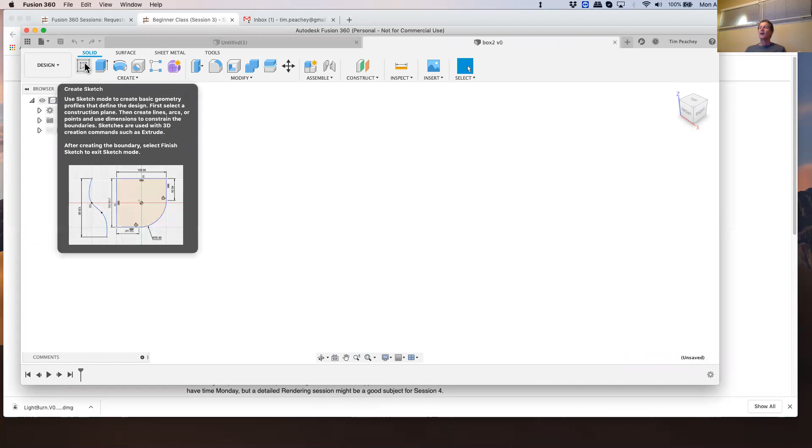And I'm going to create a sketch. Sorry, before I create the sketch, I'm going to do the parameters. So we want to do our top-down design approach and create our key parameters for the design.

Now, there was a question last week about favorites, so I examined what favorites was. Basically, if you have a complicated design with a ton of parameters but a few you want to find at the top of the page, you star them and they become favorites at the top. They are still only local, they are not global.

And there was also a question last week about exporting the parameter table and importing it into a different design. What I found was there's an extension out there - not one of the pay extensions, but one you can find by Googling it and install to export the parameter table as a CSV file and also import CSV files into your parameter table. So there is some sense of being able to do family design and a top-down hierarchical parametric approach to a family of parts or products.

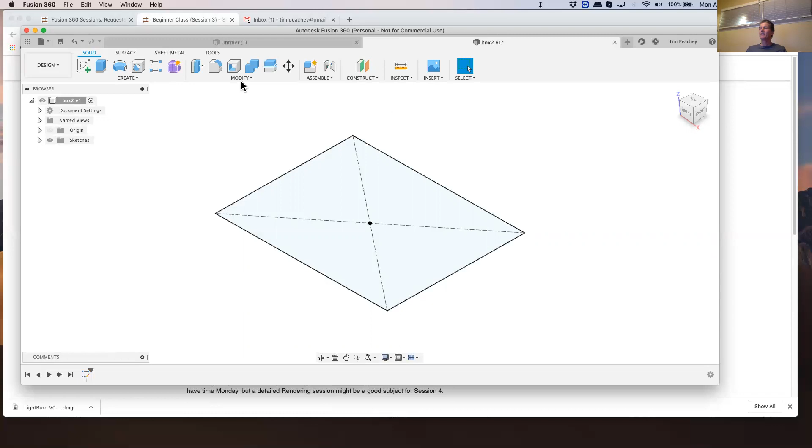Basically, if you go to parameters, when you create a new parameter there's a unit pull-down. So you have no units for fractions and counts, but then millimeters, centimeters, meters, microns, feet, yards, miles, nautical miles, mils, different approaches to angles, and a whole bunch of other kinds of parameters that might get used in analyses, management of materials, and things like that.

But you could mix units—like for width, you could have put that in inches. Absolutely, in addition to having the others in millimeters. So for example, I could come in here—let's change this one. Oh, we can't change it after the fact.

That's interesting—we can change the value but not the units, it appears. We can change the name but not the units. But we could create one here, and let's say we just call it 'lip' for the sake of argument, and make it in inches, say it's 3/4 of an inch. That's totally valid. Okay, thank you.

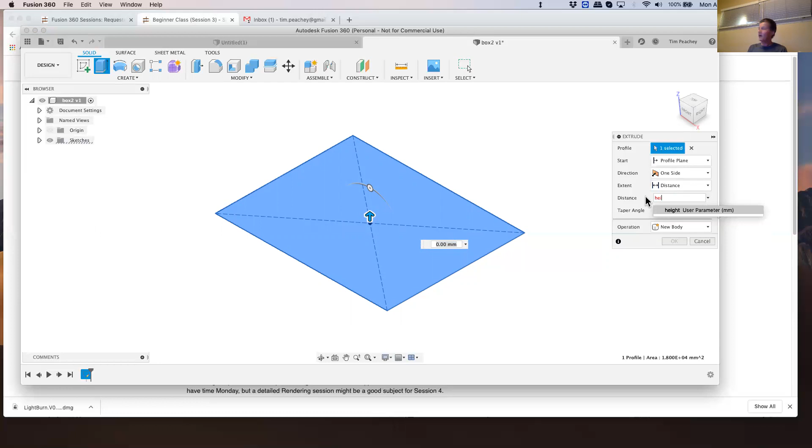So now I'm going to create an extrusion for my box, for the bottom of the box. I'm going to extrude this—it was already selected. The distance is going to be height times, now what did I call it—lid ratio, bottom fraction.

But there's something I forgot to do here, which I've tried to always remember and told everybody to do, and that is always create a component first. So I'm going to create this new component, called the base, and the parent is selected—say okay. Now I'm going to drag this sketch in here, and now my sketch and body and everything are in here. I pulled the sketch in, and since the body was a child to this sketch, it brought the body along into this part with it.

Now you'll see that I'm activated on the base, and my timeline has the sketch and the extrude. So even if we forget a few things, there's lots of opportunity to come back and repair what we've done wrong.

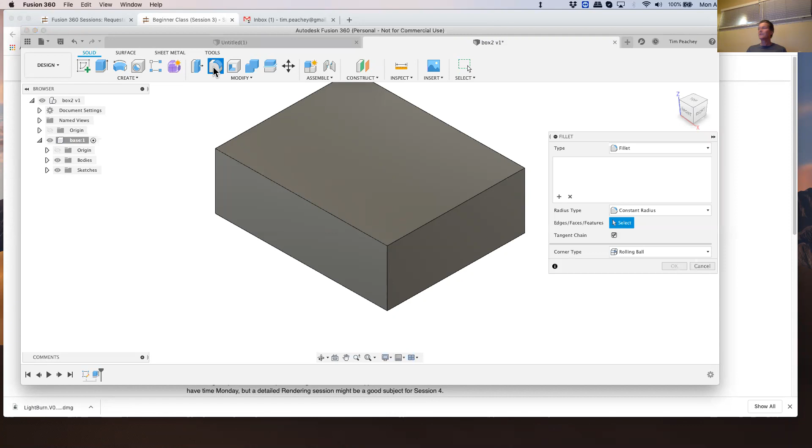Now I'm going to do my little trick of adding a solid fillet. I'll just grab these—whoops, not that—this edge, this edge, this edge, and we're going to say that could be, I don't know, 10 millimeters.

And I'm going to say okay. Now, we didn't control the outside radius of that fillet with a parameter—we did that on the fly. If we go back to the change parameter dialog box, we see now under model parameters it says 'base' because we have a base part that has some parameters. We can see the sketch—it has linear dimensions, which it arbitrarily assigns the values D5 and D6, but they're controlled by the expressions width and depth.

The extrude is controlled by the expression we put in for height and the default taper angle of 0. The fillet here is D10, and it's 10 millimeters.

Now this is perfectly fine if we figure that we never really need to modify this fillet. We don't need to fully parameterize, if that's a term, the full design. We can leave it like that.

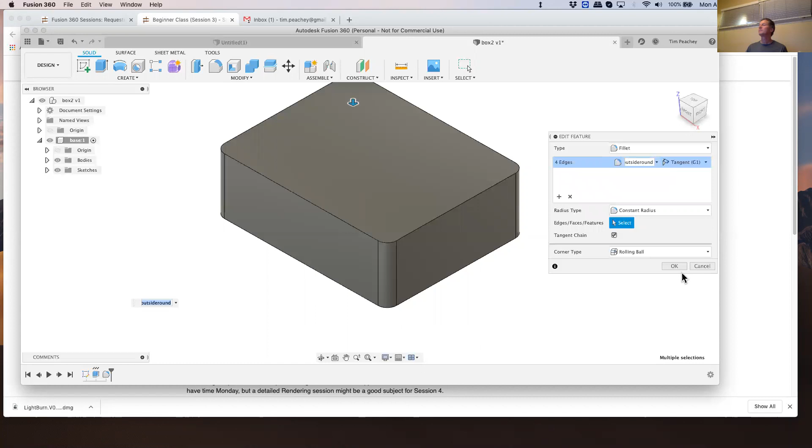Now when we go back here, this round, if we were going to edit it, we see that the value is outside round. So we can make the parametric relationships later.

Next thing I'm going to do is create the top. Think about this: do I want to create the top or do I want to finish the base? Maybe I'll finish the base. Remember from last week, I like using shell. So I grab shell, I grab this top surface, which means it's going to be removed.

And I didn't define the thickness, did I? I don't think I did. So if I go for thickness, there's nothing there. So I'm just going to say 2 millimeters for now.

But again, I'm going to say, you know what, I want that to be managed in the parameter table. So I'm going to come in here and add something called thickness, and then I'm going to come down to this shell and change this value to thickness.

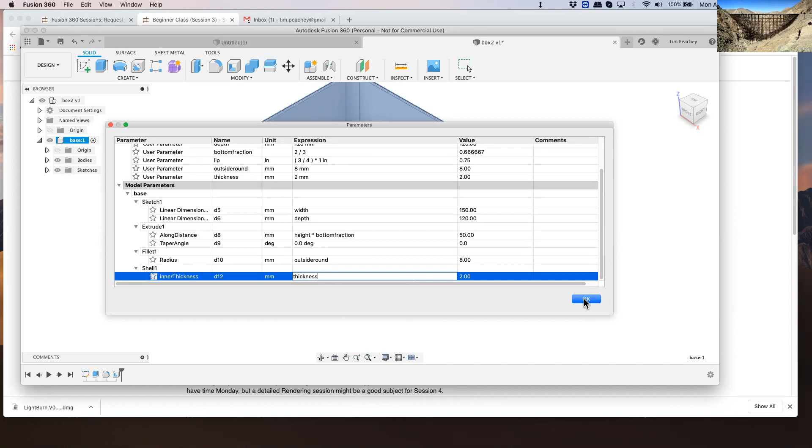Tim, can you confirm that the shell created a thickness of 2 millimeters on all 4 walls and the base? That's correct. So let's look at that with a measure. If we measure from this surface, using the shift roll key to go to here and grab this surface, you'll see it measures 2 millimeters. Great, thank you.

Okay, so there's my rudimentary box. I want a lip along there, and actually it's kind of narrow. It's kind of a thin wall for this size of box. So let's double the wall thickness.

So I'm just going to come in here to thickness, change this to 4. I'm going to try to change it to 4, but I'm going to do it in the correct field this time. And now I have a 4 millimeter wall.

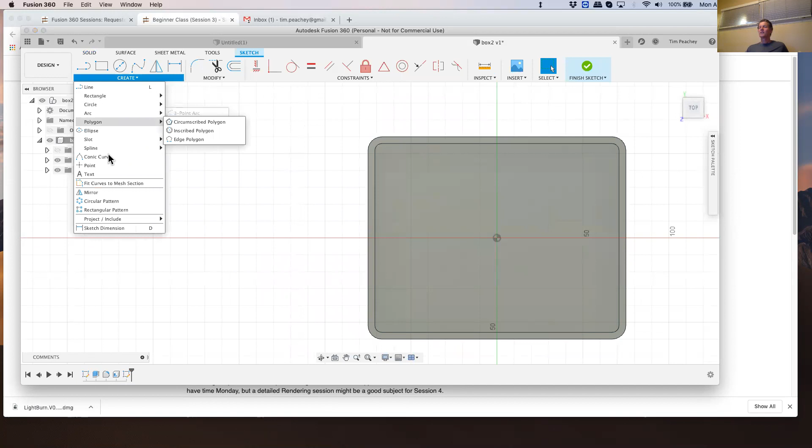So I'm just going to say the lip should be half the wall thickness. Let's create a sketch right on this top surface, and let's project this outer edge, and then let's do an offset.

And we'll do that from this outer edge, but we'll do a chain selection so that we get the whole outside edge. We'll bring it in here, and you notice it's negative.

And in the video, he was having trouble using the parameter, and I think it was because the value is negative to begin with, so it kind of does something weird here. So what we're going to do is we're going to go with that.

We're going to say -2 first, but then I'm going to come back and edit this dimension. Oh, it still says -2. So I'm going to say minus thick.

Why is it not working? Because I'm not spelling thickness correctly. Minus thickness divided by 2. And now we see the fx that tells us this dimension is controlled by a function.

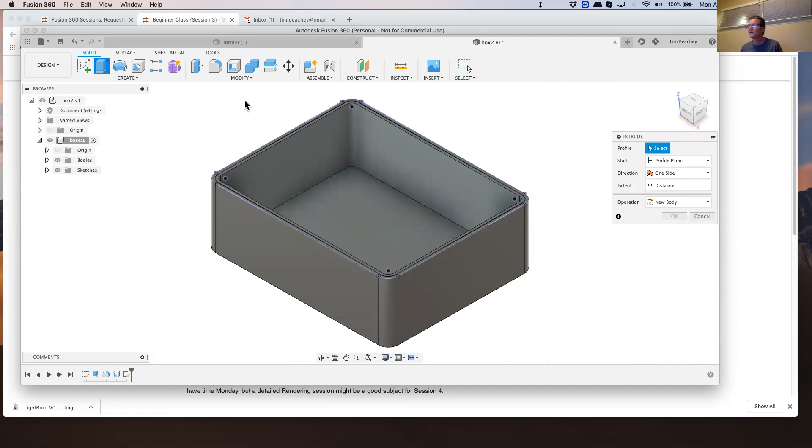And we'll finish the sketch, and we'll extrude this. Zoom in, make sure we get the right profile. And we'll take this down.

And again, I don't think that we had a parameter for that. So it's like, yeah, that's when we want a parameter because we're going to use it on both sides. So I'm going to go back to the parameter table, and maybe, actually, we didn't end up using this one. That was just for demonstrating something.

So let's add a parameter that says lip. I want it to be millimeters, so I had to delete it. And let's go with 5. It doesn't need a huge overlap.

And we'll come down again. We can either come down here and edit that in our extrude here. Minus lip.

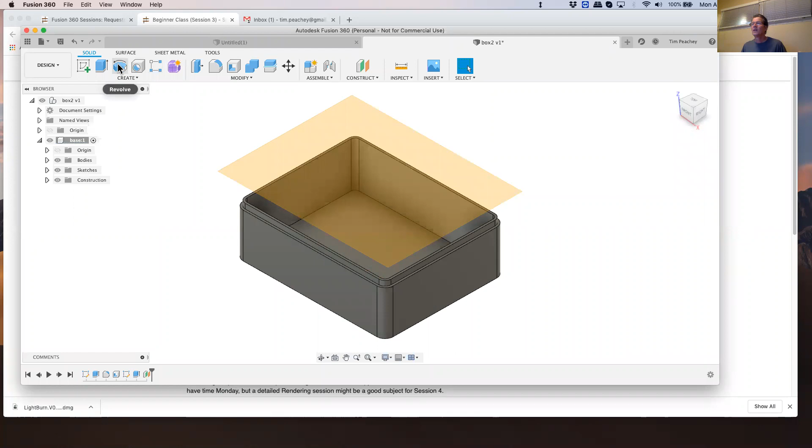So if I look at the front view, you'll see that plane is there. Okay, so I create that plane there, and now I go to create a sketch using this plane. I can project geometry onto this plane from any existing geometry down below or above for that matter. But it will put that geometry into the sketch on the plane that I selected as the sketching plane.

So if I go for my project and I pick, in this case, let's say I want to pick... let me find another edge here. What's it picking? Specified entity here.

Now I selected just that one entity by doing specified entity. If I look at part of the body, let me grab this. And that's my projected geometry. But what did you grab just then? I grabbed the outside edge of the box. And you see it's created this projection on the elevated plane.

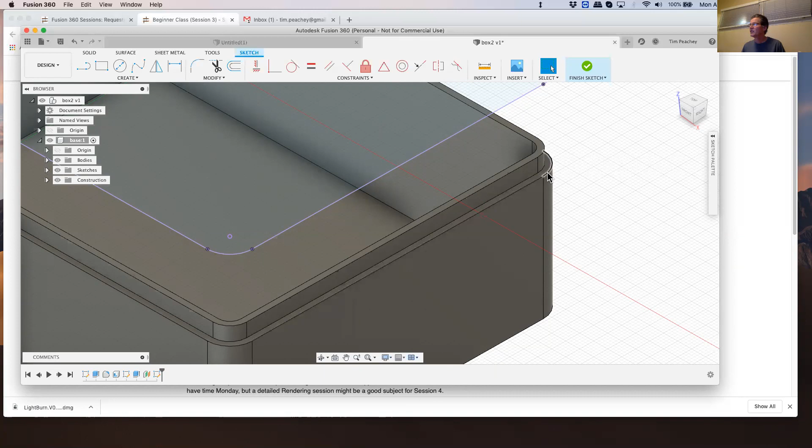So it's projected, basically it's projected the chain of edges that are consistent with this edge. So all the tangent chained edges there. Maybe not even necessarily tangent in this case, it's just the chain. And giving me that closed sketch on the plane up above.

So those two planes, one your chosen plane that you want to project, and the projected plane, they are always parallel and only parallel. I don't believe so. Let's try. You should be able to project geometry onto the, it'll be in the perpendicular direction.

So for example, if you have geometry on an inclined plane, yes, you'll get it projected as it would be viewed perpendicular to your sketch plane. Okay.

So for example, if it were a rectangle, the rectangle on the inclined plane would be larger than the projected rectangle on the sketch plane. Is that, or projected rectangle on sketch plane, you understand what I mean? Yeah, I'm with you. Okay, thank you. Yep, no, good question.

So when you did the projection originally, what were you projecting on? I wasn't really following that, I guess. Yeah, it wasn't as clear because what happened was I was projecting on the same plane.

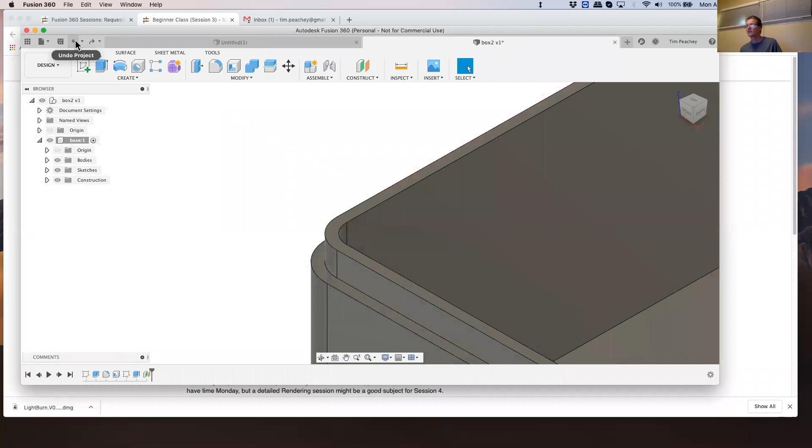Okay, so actually let me do that a little bit differently to make it more obvious. Let's just back up to beyond this sketch. We'll skip that plane and we'll start right here. So in this case, I'm going to create a sketch, and I'm going to start on this plane here.

Okay, and I'm going to project the geometry from the outer edge. Okay, so now when I look, you see the geometry is projected from here, but onto the plane defined by this surface.

So in this case, there's 101 ways to model things like this, but this kind of follows the way my logic works in terms of defining the model, the part. So I'm now going to finish the sketch and extrude this profile.

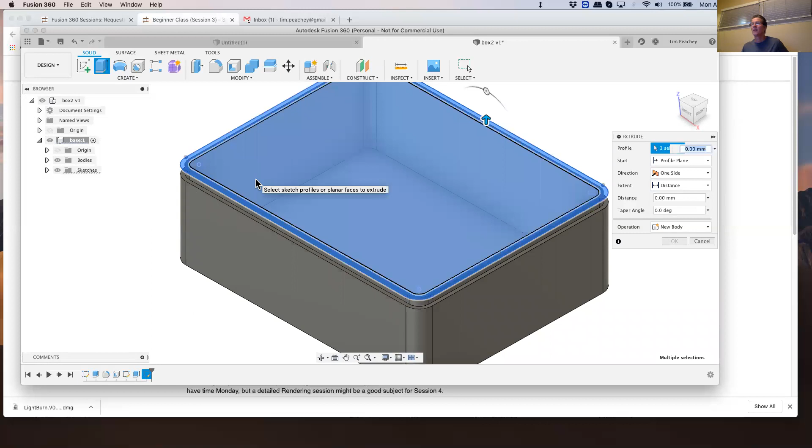Now Fusion does this interesting thing where, even though we've got a single sketch, it doesn't take the whole sketch when it sees other things in plane like that. So we have to sometimes select all of them. Now, we wouldn't have to select all of them. We could just select the wall portion, extend the wall up, and then do a base on it. In fact, maybe I'll do that.

But when you were selecting, you were doing just simply the click with the shift key down and accumulating the bodies? Don't even need the shift key. Don't need the shift key with Fusion. Fusion 360 likes to do single key selection.

Okay, now the height of this extrusion, this is the top, is going to be height times, height times bracket 1 minus bottom fraction, right?

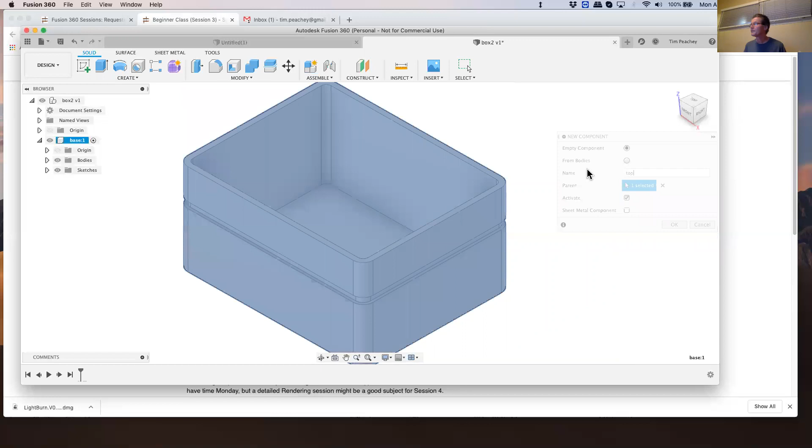So now, what did I do wrong? This is in the wrong part, right? Remember, I needed to create a new component. That component should be the top. And it's now active. Now I'm going to come over here and see if it's going to let me move that sketch into there. It did. And it moved the body along with it.

So now top has what we just sketched, because otherwise it was just an unseparated extension of the first. Correct, it was just another body inside the same component. Got it, but now it's a component inside of a component. Yeah, now it's a body inside a separate component. Oh, you're right, this component is inside this component. Good catch. So what that tells us is it's treating this as a subassembly of base, and that's not really what we wanted.

So let's drag this into the top assembly. Now it's a peer to the base. So these are the kinds of hierarchical and parent-child relationships we need to be careful of, and one of the things Fusion 360 is actually easier than some other packages at fixing. So it's easy to do this sort of drag and drop reordering.

It works well. Now, you do need to be careful about the time order in which you do things when you are using geometry from another part, because we're not finished designing the base and we're already using its geometry for the top. If we add features to the base, those features won't impact what was done to the top already because they're at a later point in the timeline. Now, if we go back and change the earlier features or the early parameters, then it will affect it. And it's sometimes a little tricky keeping that all straight.

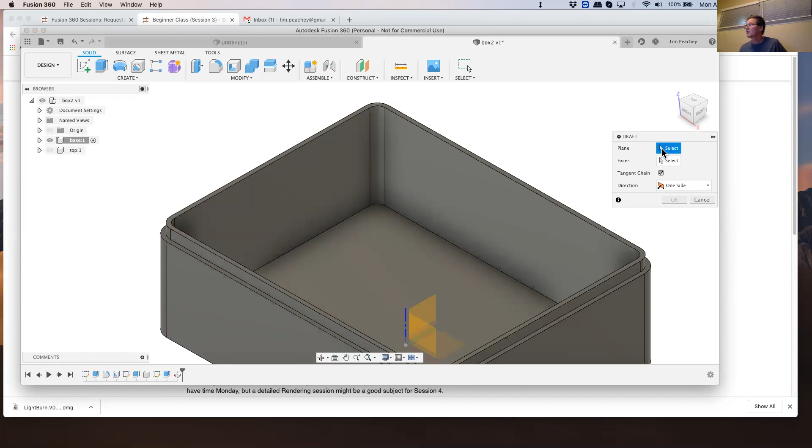So that's something called a draft angle. And so we're going to pick a plane. This is a base plane or a ground plane from which the angle is measured, a parting plane. The term parting comes from molding, because this is something you would typically do in molding or casting. Now for the faces, again, I've got tangent chain selected. Now I'm going to pick this face. And because the fillets make all these other faces tangent, I've collected the whole ring. Let me just spin that around, show you what I mean. So the whole edge around there is selected.

And now, let me go back to my home position. I can give that an angle. I don't want it to be a real crazy angle, or I'm going to have a knife edge at the top, but 5 degrees sounds reasonable. Now what happens is, as my top is moving through a bit of an arc because of the hinge, when it closes, it's going to have a little bit of give right until it gets there.

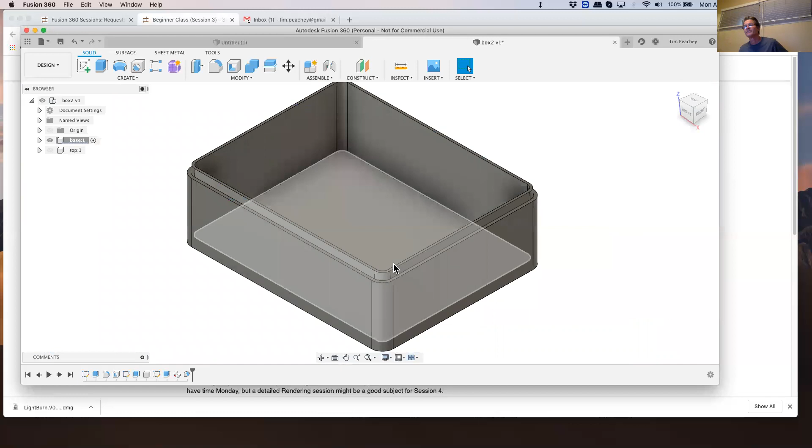So that worked well. I'm going to turn off the base and turn on the top and activate the top. A couple of things that are missing, the actual top of the top. So let's try something here. Sometimes we can infer, if we're drawing something, we can infer profiles from the plane that would be the sketch plane. So let's see if we can't select this profile.

Hey Tim, just a quick question about the way the logic of the application works. You didn't choose this component and start working on it, you turned off the visibility of the other component. Does it then fall to this one? No, I had to discreetly do that. I can have the active component be hidden. Right now, the active component is hidden. Now it ghosts it to me to let me know that that's actually the active component. Okay, so you actually selected it and I simply didn't notice. Correct, yeah. If I select up top, the top assembly, it's going to ghost the whole thing.

But if I come down here and the base is off, then I'm just going to see this. Got it, thanks. Yeah, no problem.

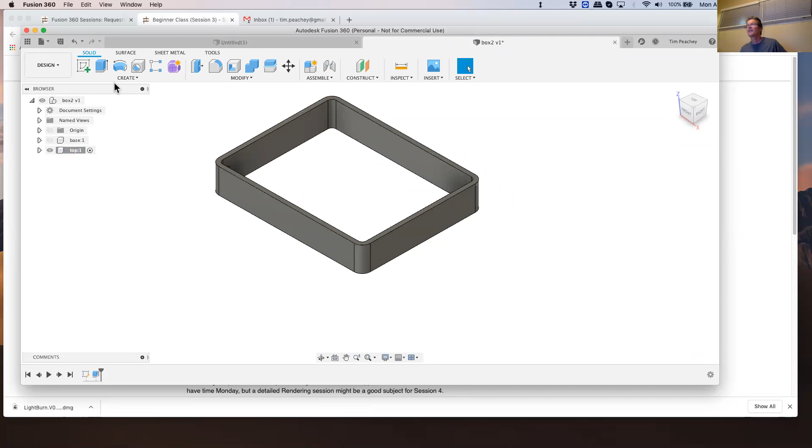So now let me think about this. If I were going to use a surface here and extend it, Fusion 360 is actually smart enough that I can just grab it. But in this case, I want to do the whole top surface, which includes the hole in the middle here, so I'm actually going to have to create a sketch.

I'll create a sketch and use this surface here, and again I'm going to use project. There are shortcut keys, I could use P, but I don't like to do that when teaching because it's less easy to see. So I'm going to select this geometry, and it's going to give me both circles, but that's okay. I could delete it, but it's going to do this weird thing selecting it anyway, so I'm just going to say finish sketch. Now I'm going to create an extrusion.

I'm going to grab this and this, and extrude down. Now here's the interesting thing: I'm trying to add thickness, but because I'm going negative into the part, Fusion 360 jumped to the conclusion that I'm trying to do a cut. I'm not actually, I want it to join. And the distance is going to be minus thickness.

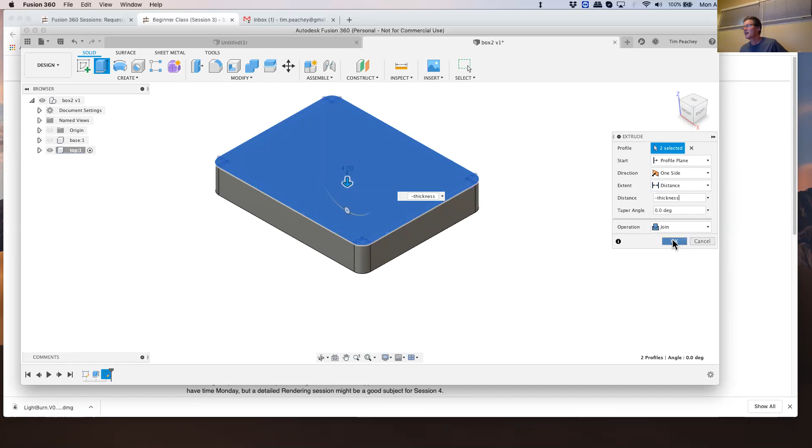So your top surface actually was from the plane you were working on into the model, as opposed to adding it on top, which intuitively would have been what I thought you'd do. You would think so, but the reason I did this is because I used the height parameter to drive the height of that first feature, and so now my overall height is going to be height plus thickness. Oh, right, got it, I've done it that way. So this is my design intent to preserve the integrity of my parameter.

Now if I activate the base, in this case, I have this gap here, which is the other part of the lip. So what I'm going to do is hide the base again, turn this guy over, and create a sketch on this plane. I'm going to project from the outside, and offset from the outside in, and that's going to be minus thickness, or sorry, minus lip. Minus lip.

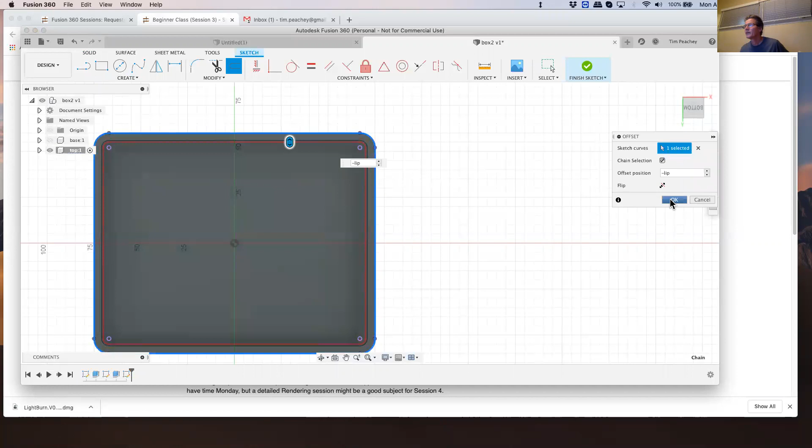That's not right, that looks too big. No, that's the wrong formula. Lip is the vertical lip, so this is going to be minus thickness divided by 2. We decided, right?

Okay, and we'll finish the sketch. Let me just orbit this a little bit so we can see it. Now we're going to finish the sketch, create an extrusion, and this is going to be this outside surface, and we're going to go up, or in this direction, by the amount lip. And it's a join.

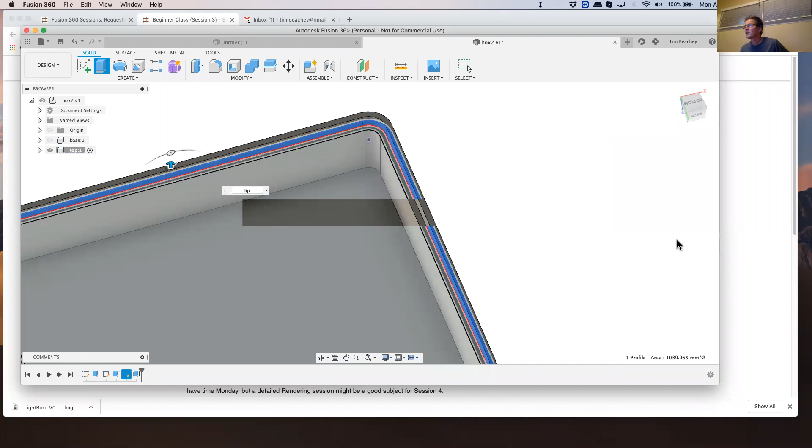And there we go. So now if we go back to our default and turn on the base, now we have the boxes closed.

Tim, were you going to do a taper on the upper lip as well, or did you just find that the bottom one was good enough? No, I like putting one on the upper one as well.

What I wanted to do is, let's go back to our fun little section tool. Grab this face, go in and have a look. Now, when we look from the right, we look in there, we see this gap. That's awesome, right? So now what we want to do is, our top is activated, yep. So I'm just going to say okay and save that analysis for later.

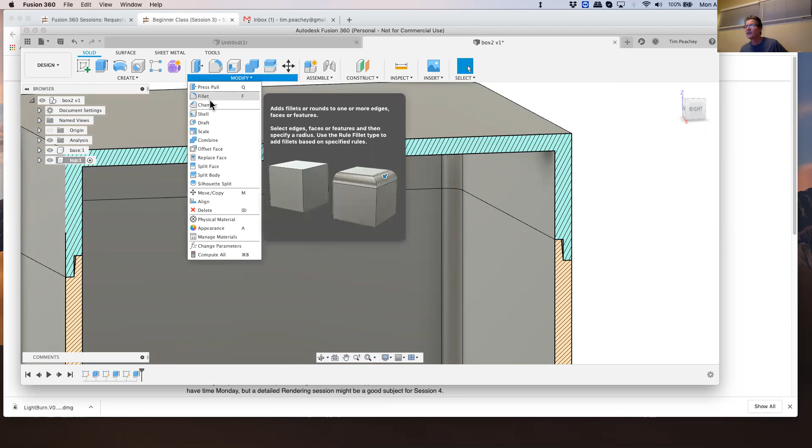And I'm going to modify this part with a draft. For the plane, I don't want to select this plane because I don't want a sloppy gap, so I can select this plane here instead. Then when I select the faces to draft, I'm going to come in and grab this one right here—again it took the chain around there. My angle, I'm going to take 5 degrees. Or you know what, maybe I'll make it 4 this time.

Now when I look in there, yeah, I actually do have a little bit of an extra gap there. And it's good to put in little clearance gaps and tolerance gaps, since our 3D printers aren't that accurate. That takes a little time, but I think most of us understand.

Paul Porter in the demo did some of that, so I'll leave that for you to learn from him, and the same thing with the hinge—I'll let you look at how he did the hinge, because I'd like to finish this one and move on to the next one before it's too terribly late. But this is a bit of a different approach. I like the shell; I like to build things all in one place.

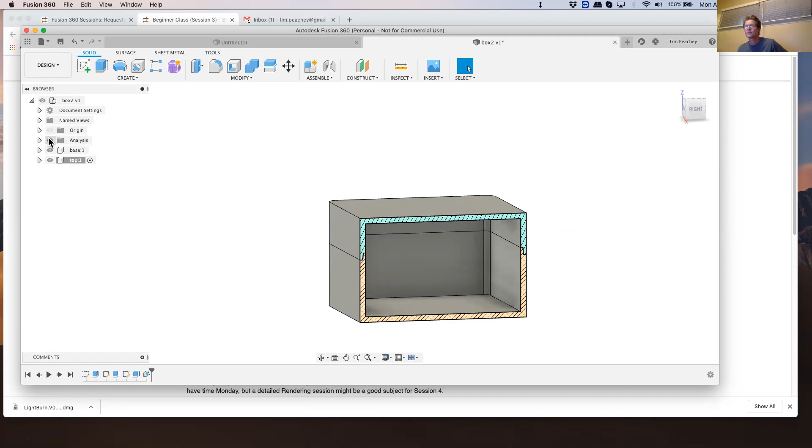And then later we can come to the base and export it as an STL if we want for 3D printing, rather than building them side by side and then exporting them to the printer. I didn't quite get the logic in building them side by side, unless it was because he's thinking about dropping them on the platen of the 3D printer.

So Hey Tim, a question. If at this point you wanted to make this, say, half again as big, do you have to change both the top and the bottom, or how does that work? So let's say if I've done the parameters correctly - it's a really good question. One of the things we should always do is basically flex the design. So let's see what happens if I make the height 150.

Okay, very cool, it went up. Let's make sure that we don't have an interference there. So we can do an interference check between this part and this part. Compute - no interference is detected. We can also turn on our analysis, come in here and look. Yep, it's still the way it's supposed to be.

Tim, could you define interference again? Interference, good question. Interference is a technical term for when two parts are trying to occupy the same location in space at the same time. Got it. And so the problem with 3D modeling is we can create interferences that can't really happen in real life, and then our part won't assemble.

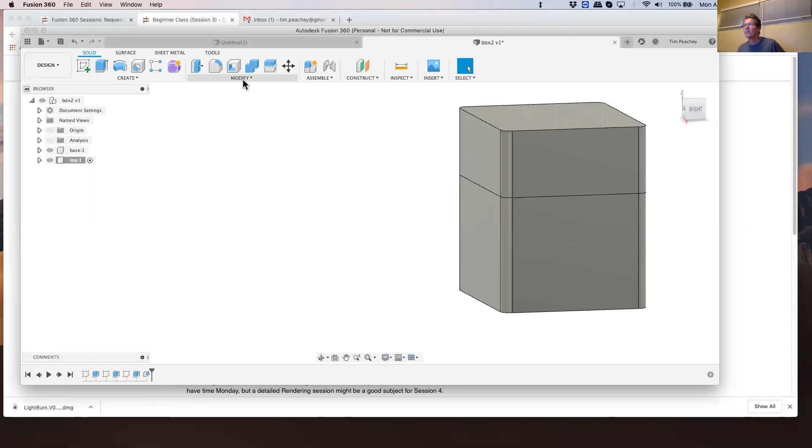So if we want a simple example, let me turn on the analysis, and then I'm going to come in here to parameters, and I'm going to come down to where we had - in the - looking for where I had thickness divided by 2. Let's look inside here. Let's say we did thickness times 5 divided by 6.

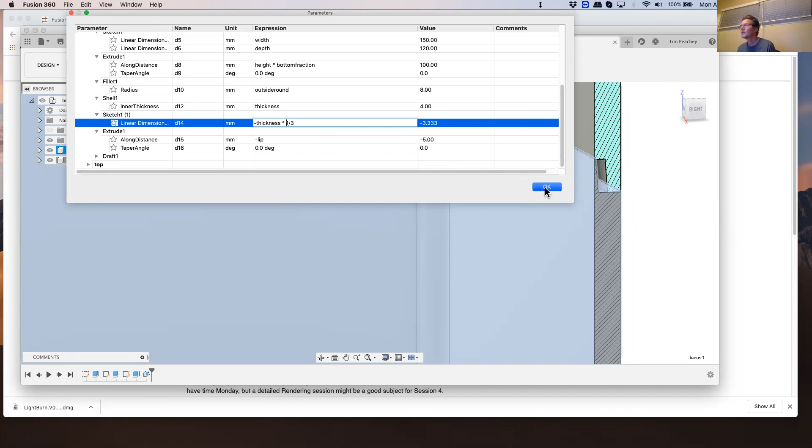Okay, now, oops, that was the wrong way. Now I have a big gap in there. Let's go to that weird parameter that we just had, and let's make this 1/3. Not 5 and 1/3, but 1/3.

Now you can see this part comes out here and this part comes in here. They don't fit. And so if we do the interference check between this part and this part, and we compute - well, that's odd, why did it not detect the interference? I think it only selected one of those. Yeah, it only said one. Okay, let's try that again.

Inspect, interference, select this one. Include coincident faces, let's select this one. And then let's compute. And there it shows us interference in red. Wow, and it even computes the volume. Because there are times in design when you use interference, when you press fit something, for example.

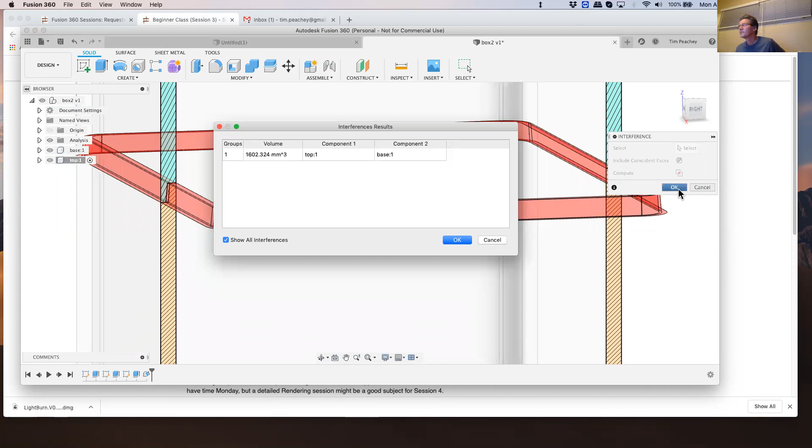Thank you, Tim, that was great. Yeah, I love these questions because that's how we're learning - we're taking a fairly basic part and we're learning some of the more interesting aspects of it because of the questions that people are asking. I think there was another question in there.

Yeah, I don't know if this is easy to answer or not. I'm a little confused as to when you say the thickness is like lip or top - is that because it directly relates to your parameters and then you can tell your parameters what the value would be? That's exactly it. So the thing about parameters is, sometimes something like thickness, height, and width aren't the best terms.

It might be good to rename this to be wall thickness, so that we know it's not a program parameter, it's a user parameter. Hey Tim, can you say back what her question was, please? So the question was, why were we using thickness in multiple places? Where was thickness coming from? Why was it relevant? And why could we use it in multiple places? If I understood the question correctly.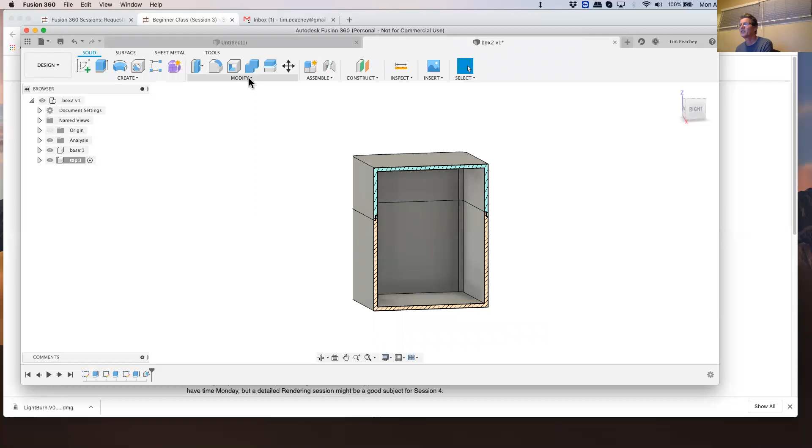Did I, Elizabeth? You're muted - she might have muted there. That's what I understood the question to be. So I think maybe she hadn't been aware that thickness was one of our parameters rather than something the program gives us.

Or I guess a follow-up question then is, at some point you said the thickness was the lip, and so that talks back to this window, and it knows the lip is 5 millimeters. Okay, so I talked that through. So then if you weren't - I guess I'm confused as to if you can do it so that you can just put in 5 millimeters. Would you be able to change that in this location still, or no?

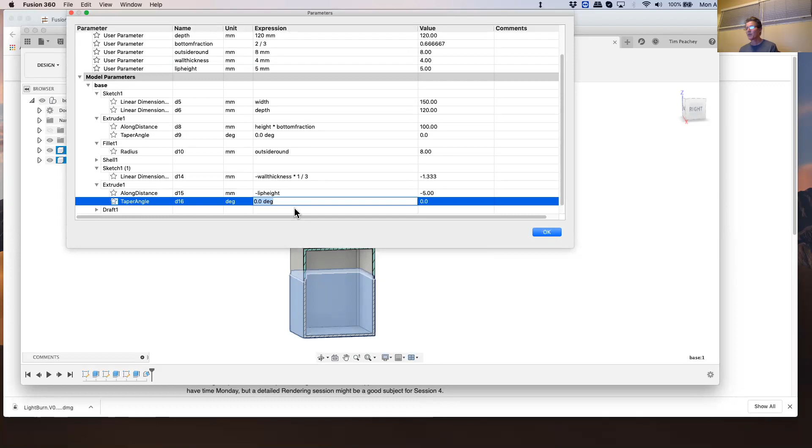Yes, you are, and that's a convenient thing. You have to come into the model parameters and find it, because sometimes these are not visible, right? But for example, if you look at this taper angle on the extrude, the taper angle is 0 degrees. This is probably going to break something, but I'm going to put in 5 degrees, say okay, and see what happens.

Actually, 5 is, we probably just can't see it well enough. Let's make it 20 degrees. Oh, that's interesting. Oh, there it is. It's this taper, this protrusion. See that taper angle? That's what we were changing there.

So yeah, that's one we can do at the parameter table. And it's a really good point, because sometimes it's a bit of a pain to go back and find the sketch or the extrusion when we have a long timeline to edit it. Whereas if we come in here, we can maybe more easily deal with it, and then update the design.

Hey Tim, is there any rule that's good to follow, such as instead of saying width, depth, and height, we might say overall width or object width, just to distinguish the general term, which could have been width in so many different ways in an object, from the overall? I'm just curious if that's a good principle to live by, or if it really doesn't make any difference.

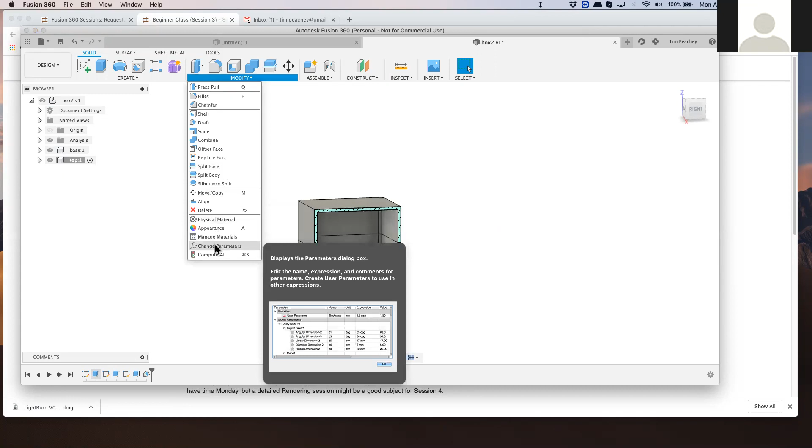Further questions on the box? Yes, I have a question on the parameters. Is there any way to tell the parameter table to sort by name, for instance? I do not believe there is. It's basically in chronological order.

But the advantage is, there's a couple things you can do. One is, there was a question last week about favorites. So once we get down to where we have a lot of parameters, we can make some favorite parameters, and then they're always right here at the top and easy to find. And then the other trick with parameters is when you're actually using them in a sketch, you type one or two letters and it gives you the list of parameter names that include those letters you've typed. So it's to your advantage to actually use long names that are very descriptive, because it's pretty easy to find them with just a couple of keys and then select them. And it keeps the design intent, and it's better practice, per Travis's point a bit ago.

Okay, and I'm not sure if everybody was here when I brought it up, but there was a question also about, can we export the parameter table? And I haven't done it, but I did a Google search and found there is a free extension for Fusion 360 you can download and install that will allow you to export it as a CSV file, and also to import CSV files that are in the proper format. Now, there were people complaining that the exported format wasn't actually valid as an import format. You had to massage it a bit, but that might have been an earlier version.

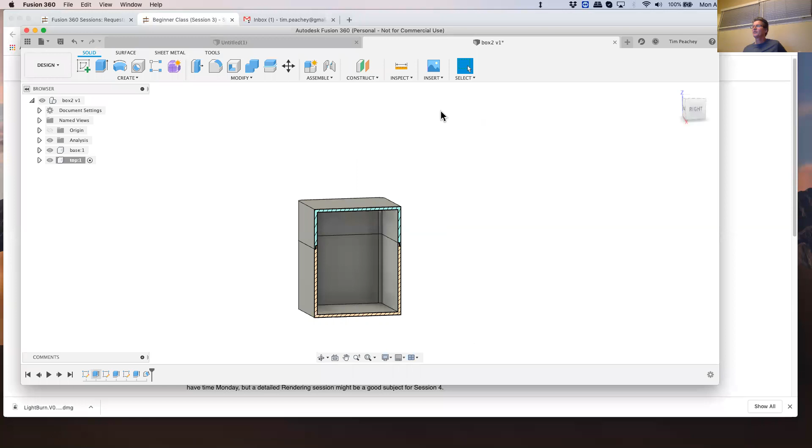So let's try something here, and maybe it's a bit of the default. Okay, if you want to be like that, let's save this, and then... great file name there, Tim. Yeah.

Because we can actually go with feet, but let's do inches. Okay, let's sketch something here. Let's do a rectangle from here to here, and I'm going to use 20 feet, tab, and 40 feet. There's my sketch, and it should still work.

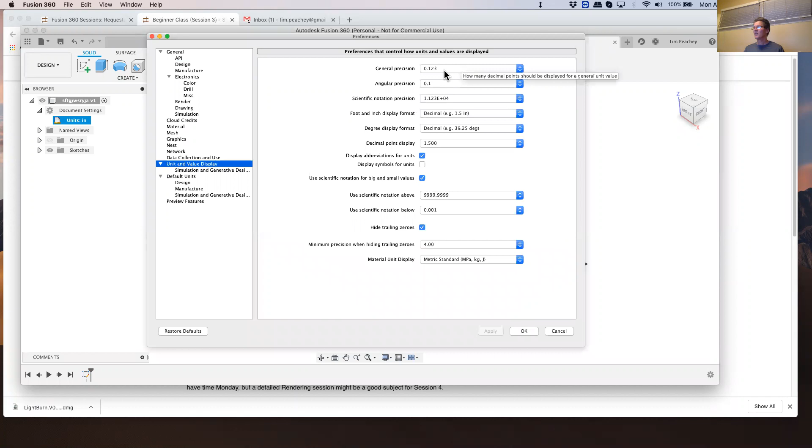There's something related to accuracy. There's a parameter called accuracy, and usually it's dimensionless, so it's impacted by your units and your scale, and sometimes you might want to change that parameter. I have to remember where it was. Here it is, general precision. Oh no, that's just displaying, that's not what I was thinking of. Precision in a different CAD package meant something completely different in this case.

So now let's extrude this, and we'll go up like 120 feet. So it might have been something else that broke. Yeah, I guess so, because you didn't have a problem.

Yeah, you can do houses. One of the projects I keep meaning to do is just gradually model my house so I can pretend I can afford new furniture and figure out where it might go.

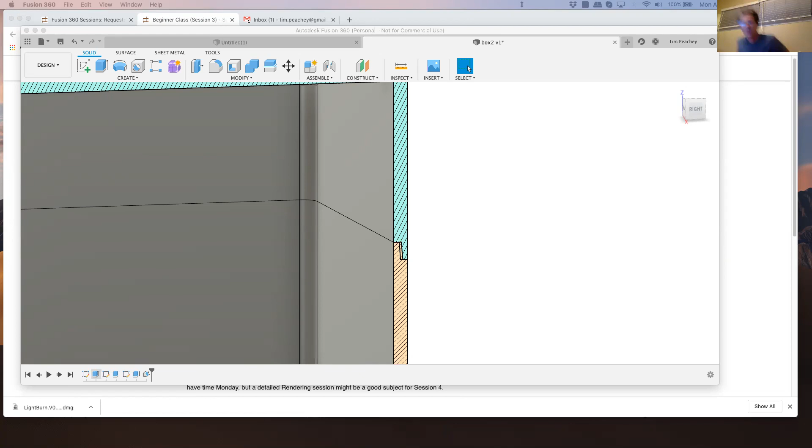Hey Tim, can I ask you a kind of high-level beginner question? Sure. Over in the upper left-hand corner where you currently show 'design,' we have a lot of other views into this package, and you can assume a little from the individual words or pairs of words that are there, but can you put those words into the broadest context of what this package does and maybe how one layer relates to the other?

Yeah, that's a good question, because there's a lot going on here. So design we're familiar with — that's what we're doing right now, where we sketch and create bodies and components. We also can do things like assemblies and joints and specify motion and movement. There's animation, where we can create animations of assemblies — things spin, things turn, they push each other around. So for instance, if you had modeled a V8 engine, you might be able to watch the animation of it functioning? Correct.

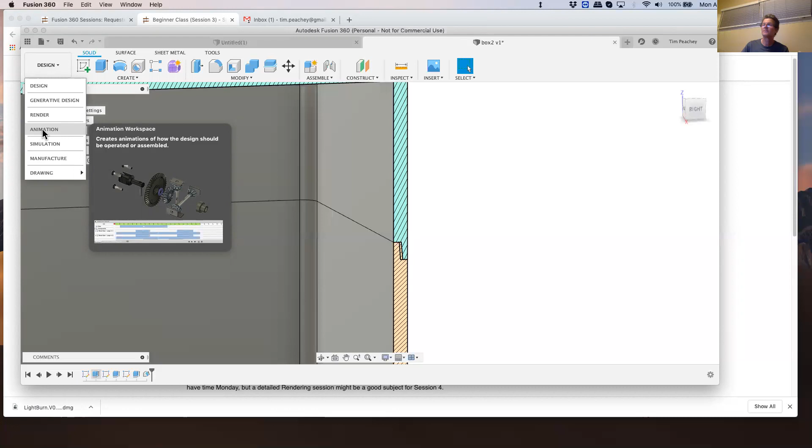But there's also, I believe, some iterative approach in there. There might be a link between generative design and simulation. The purpose of simulation is really to analyze the design and then iterate it to make it better. Find the weak area, strengthen it, see how it's going to behave under certain things. Usually there's stress, temperature, and what's called modal analysis or vibration. Those kinds of things you can analyze using a simulation workspace.

Manufacture, Mark introduced us to this a little bit last week. So this is where we do CNC, tool paths, 3D printer stuff, etc. And in the drawing package, we looked at a little bit last week as well, and those other videos looked at drawing. Some people probably won't use drawing, and that's perfectly fine. If your intent is to design parts and output to a CNC router or a 3D printer, you might never really need drawings. So if that's the case, don't worry about it. Some people want the drawings when they go to build something. If you're doing things like furniture, it's useful to have the drawing there.

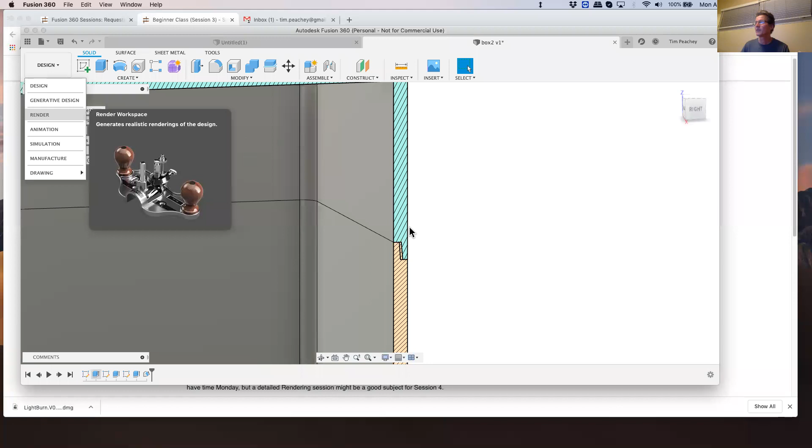Any questions? Any more questions about the interface, or about anything you've observed over the last week, including tonight?

Okay, in that case, what I'm going to do is look at this cracker platter. I'm not going to do the whole thing, but I'll go through a couple of steps. In particular, this groove is an extra complication, and it's not immediately obvious how to do it. I'm not sure if you all had a chance to play with it or not, but I played with it a little bit and tried a couple different approaches, and thought about the pros and cons, and I'll discuss some of that.

So the first thing I'm going to do, of course, is save my component. So this is cracker tray. Oops, that didn't happen. I meant to hit save. Cracker tray. And then I'm going to create a component, and that's going to be the tray base.

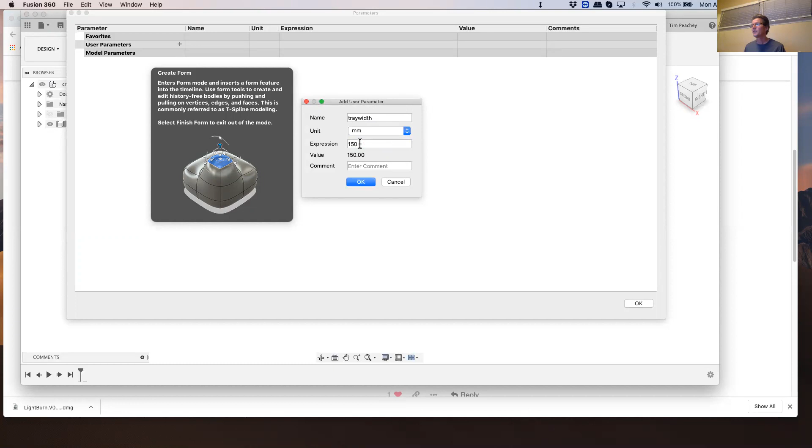Okay, so let's create a user parameter here. We're going to say tray width, and in millimeters, let's make it 150 millimeters. I don't know why this is, somehow it's clicking through somewhere or something. Okay. And we're going to have tray depth, and let's make that 100. And I'm going to have a, let's call it base thickness, and let's go with 15 millimeters. What else is going to be relevant?

If I look at the picture of my object, I think the diameter of this groove is going to be relevant. Yeah, so I'm going to use it. The other rule, back to the question of using parameters, is if I know I'm going to use that parameter in more than one place, then I definitely want to do it, so that if I edit something, I don't have to go back and edit it in multiple places. So in this case, I'm going to say trough diameter, and I'm going to say 15 millimeters.

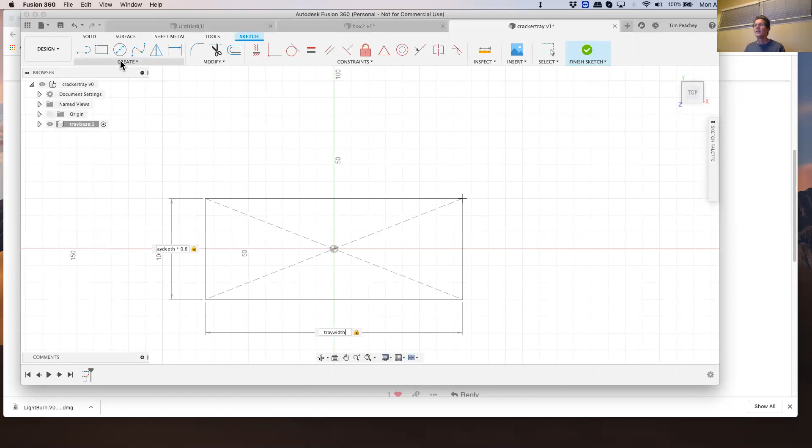Now I want to create an arc on there, so I'm going to do a 3-point arc. I'm going to start this arc here, and I'm going to come over to here, and it's going to go up to there.

Tim, were you just relying on snap to grid to get it to the same position on either side of your vertical axis there? That's a really good point, I'm glad you brought that up, because in reality I want to check whether it snapped to the line or to the grid. You see, as I move this, this point is staying on the line. So it actually snapped to the line. But it looked as though you were intending for this arc to have its apex on the green axis.

I do want it to have its apex on the green axis, and that's not constrained yet. Oh, so you're going to get to that. Okay, got it. So there's a couple of things I want here. One is, I said I want my origin to be my planes of symmetry. So what I'm going to do is come up here and use the symmetry constraint.

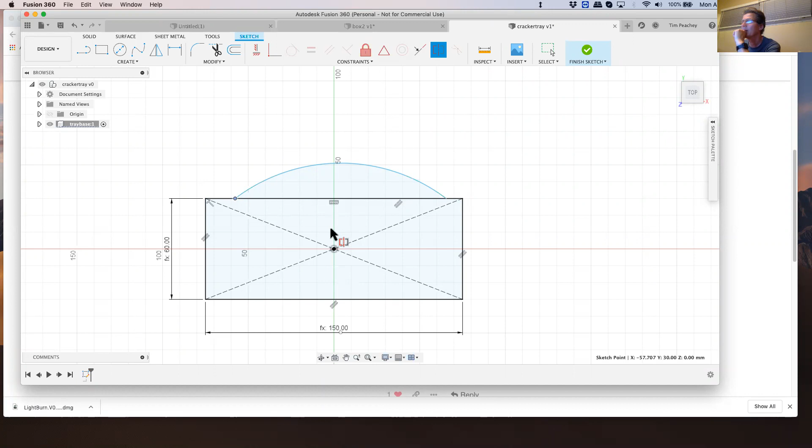I'm going to grab this point and this point, and then, oh, come on. Why is it not? You're trying to define the third point, which is the green axis? There we go, yeah, I hadn't selected the other part. So when I do that, it made it symmetric. So you want to grab the 2 points and then the line or plane that's going to give you the symmetry.

Okay, and then another thing I'm going to do here is create a mirror and grab this guy, and I'm going to mirror him using this line. So there's the mirror image.

Now I want to control this dimension. So I'm going to go to dimension, but before I select a dimension, in this case, because I'm dimensioning on an arc, it gets a bit complicated. I'm going to right click, and I have the ability on arcs and circles to dimension from the center or the tangent. So I'm going to go from the tangent here.

Whoops, I told it to go to the tangent, why didn't it do that? Pick circle tangent, yeah, to this tangent. There they are. And I'm going to put it there, and that's going to be my tray depth.

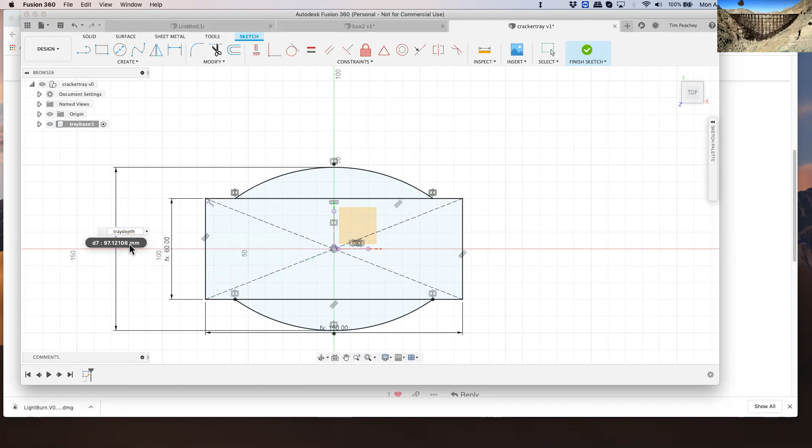Tim, I may be alone, and forgive me if I am, but I didn't exactly understand how you got the tangent to the two arcs established there. Okay, yeah, it's tricky, and it's always a bit of a pain to actually do.

So let me just... often when you sketch dimension, when you go to an arc, first of all you pick an arc or a circle, and you get, if it's an arc, a radius, if it's a circle, a diameter, and you can toggle between those two. Radius or diameter right here.

But if you dimension, say I want to dimension from there to a line, I could pick this line. Now, by default, it's measuring from the center of the arc to this line. The center of the arc is down at the bottom, right here. But that's not actually what I want to use to dimension in this case. I want to constrain the outside, the overall depth of the platter.

So I'm going to redo that. What I'm going to do is dimension. Oops, I want to escape here. I didn't want that, so I'm going to delete it with the delete button. Let's try this again.

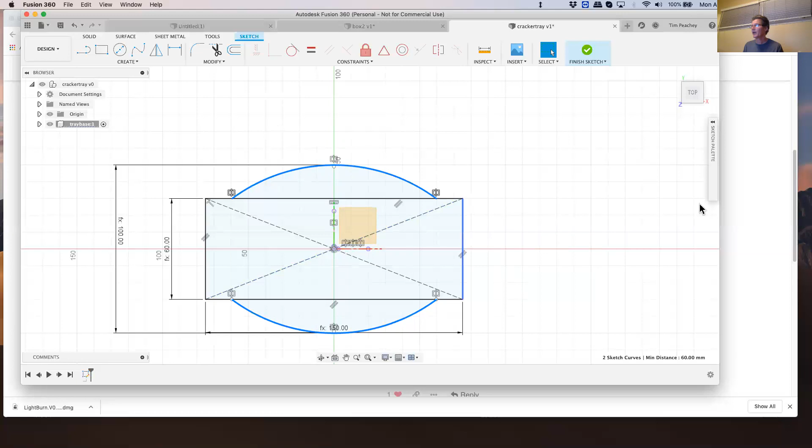So now I have a shape. I'm not sure I like the shape, but I have a shape. I'm going to finish the sketch and extrude this. I'm going to grab all the relevant parts and extend it up this way by, what do I call it, base thickness.

There it is. Now if I look at this from the top, is that really the shape I want? Not quite, let's mess with it. So what's wrong with it? Well, it needs to be wider, or not as tall.

So let's go to our parameters, and let's kind of move it out of the way a little bit here.

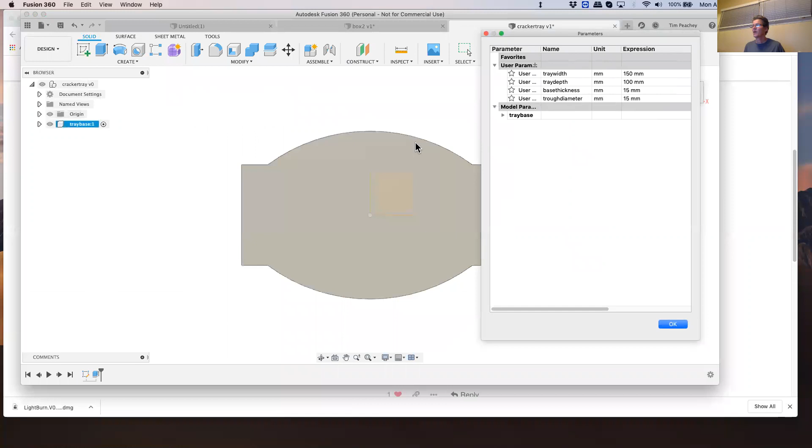Hey Tim, just out of curiosity, if you had wanted to, could you have imported the raster image in the background and iteratively, with the parameters, tweaked it until you saw the shape of your drawing match the shape of the background image that you imported?

Yes, so that's a canvas, and I want to cover that in an import lesson. Okay great, I was just curious, thanks. Yeah, it is a very useful tool. It's not something I've used much before I got to Fusion 360. It existed in more painful means in the package I was using.

Okay, now there's a number of things we can do here. Obviously we can throw some fillets on these guys here and make it get closer to the shape we want. That could be parameter driven or not.

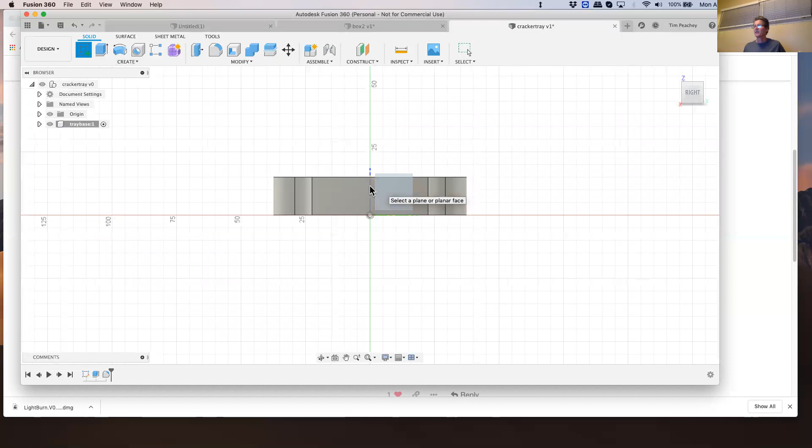We have a shape. I don't know what we want to do at the bottom of this, but I'm going to do something odd here. I'm going to create a profile sketch, and I'm going to come in here and project this object here.

So now I have some things here. I'm going to go in here and say align up to here. What am I going to do next? I'm going to create a three-point arc from here down to here, like this, and then create a line down to here and here.

Now did I get what I wanted to get there? Not sure, let's turn the body off. Nope, I'm missing a line. Is everything there that I'm expecting? Did I get a line here? I think I might have two lines there, but that's okay.

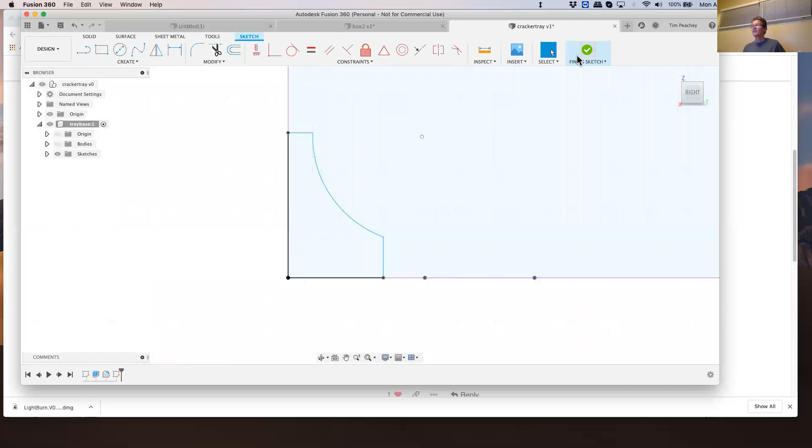Now what I'm going to do is finish this sketch. I should take more time into that profile, but I want to just quickly demonstrate a feature. Let's turn the body back on so we can see the geometry, and let's create a sweep.

The profile is going to be this profile, and the path is going to be this chain, and this chain is going to go till it gets to a sharp edge. I want its orientation to be perpendicular. It's going to be a cut. I'm going to say OK, and guess what I got? I got my router profile along there.

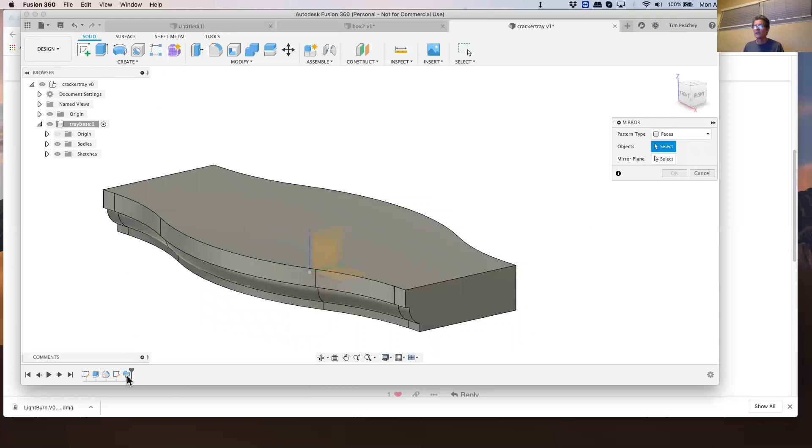I want the same thing on the other side. You know me, I'm going to do a modify - no wait, it's not modify, it's under create, mirror of this feature about... oh come on, that didn't give me the plane I wanted.

Let's turn the body off because it's in my way. Okay, turn the body back on.

And I've got my router profile on both sides. But might that not be a router bit that does not exist? I'm pretty sure the way I drew it, it does not exist.

Okay, so I just want to demonstrate how you can use the swept feature. You can do a swept extrusion, or a swept cut - in this case, a cut. And Tim, could you have chosen all four sides and had the sweep be continuous?

That's a really good question. Let's go back before the mirror. Notice it's gone now. I'm going to edit this feature. With one path selected, I'm going to try and select another path here. And why is it not letting me do it?

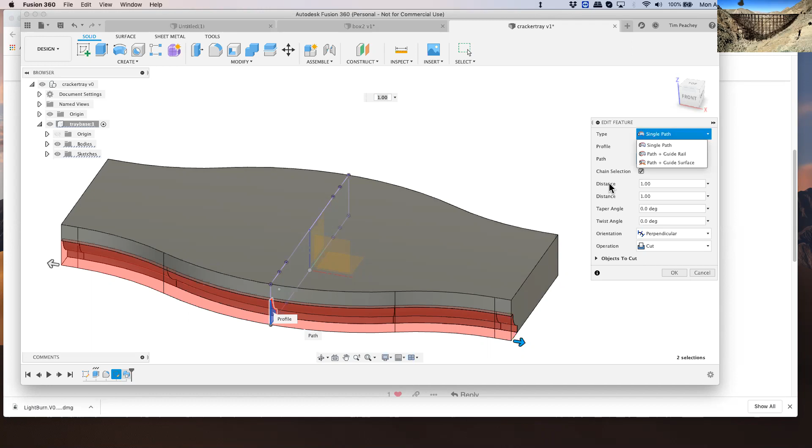When you chose path, though, I guess maybe you chose the one vector along the whole side that we currently see in red. Could you not have chosen the similar baseline on the two ends and on the opposite side?

As an alternative, I could do this. Know what you mean? But then now my profile doesn't make sense here. Yeah, I was actually trying to say that original one plus the second and third and fourth.

Right, the only way that I'm aware of doing that is if I put a fillet here that's big enough for the router to go around the corner. Otherwise, I have to actually redefine it and do it here. Okay, that's fine, thank you.

Yeah, there is a way to use master profiles, master sketches, but we're not going to get to that tonight. But the one thing I did want to get to before too late here, and we're running a little on the late side, is this cracker groove.

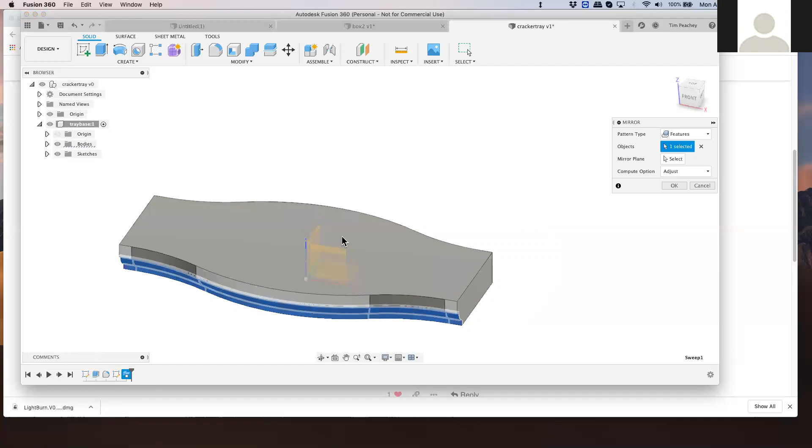So does anybody have any ideas how you might do the cracker groove? Yeah, Tim? I watched a YouTube video where they used the cutaway tool. The guy built a sphere and then a sweep, and he put the sphere inside the other body, and it swept along and cut out whatever the tool was, and then the tool disappeared.

Are you familiar with that process? I haven't done that process on this package, but I've done that process in other packages. Yeah, I saw him do it on a YouTube video. I can't remember exactly how, but basically he created a ball, a sphere, whatever shape he wanted, put it into the other body, then picked one of these modify tools, built a sweep, and moved it through the body, and it cut out that territory.

Yeah, it might be. It almost sounds like it's... I mean, can we at least agree that it sounds very cool? It is very cool. It might be like combine tools. It sounds like a Boolean feature. Yeah, I don't know enough about this stuff - I just remembered seeing it and thought, oh, that'd be cool to learn.

Yeah, one of the things we could do, obviously, if we look at this - let's go back to the picture - we could make a revolved cut with a circle that would get everything but the ends. But we'd have to define where the center point of that is, and figure out the angle, and it would be kind of an iterative thing to get the angle that works.

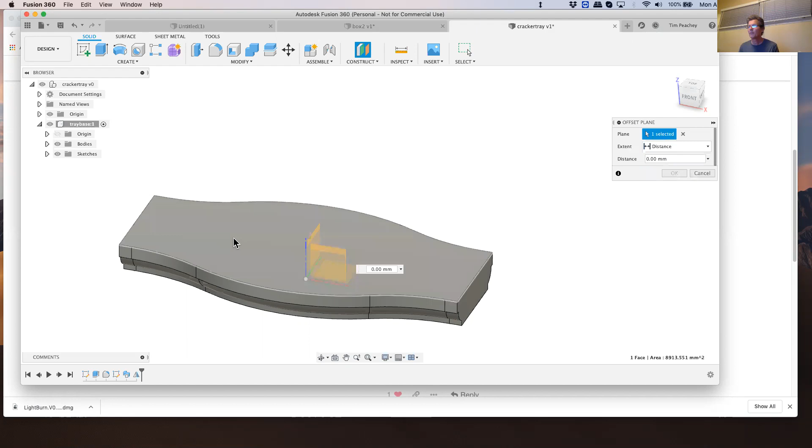I'm going to put a plane above this, let's say at 5 millimeters. Okay, so now I have a plane. I'm going to create a sketch on this plane. That plane was 5 millimeters above the surface, the top surface, correct? That's correct. So if I look at it from the front, this is the plane here, 5 millimeters above.

Now I'm going to come up on top, and what I'm going to do is an offset, but I'm going to turn off my chain select. I'm going to grab - it's not going to work on that because it's a sketch curve it needs.

So before I do that, I have to project. So first I project, and I do selection filter, so just the object that I've picked here. Okay, it's projected. Projection link means it maintains this history of the relationship to this surface. If this is turned off, if I change the dimensions of everything else, this sketch is not going to update. But projection link keeps that link alive.

Hey Tim, how is it that you chose just that portion of the curve? Is that an inflection point? Yeah, so there's an inflection point - see, here's that fillet. So this is just the portion of the arc. Got it.

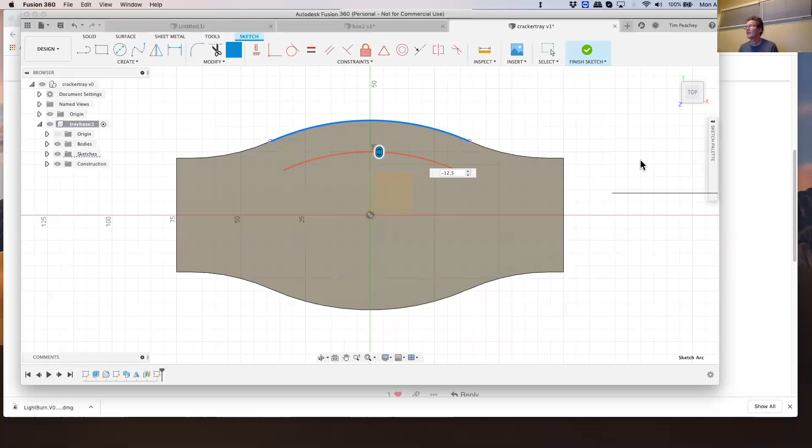Now this guy here, I actually want him to be construction, because I'm going to create an arc on top of it that I can control, so I have a start point there. Actually, I have a different technique here, thinking on the fly. I'm going to draw a line from here to here, and then I'm going to draw a 3-point arc from this endpoint and this endpoint up to here.

And what I'm going to do is say that these two arcs need to be concentric. So - come on, did I not get that? Concentric - this arc and the construction arc are concentric. I guess I had already assumed that, so now it's over constrained.

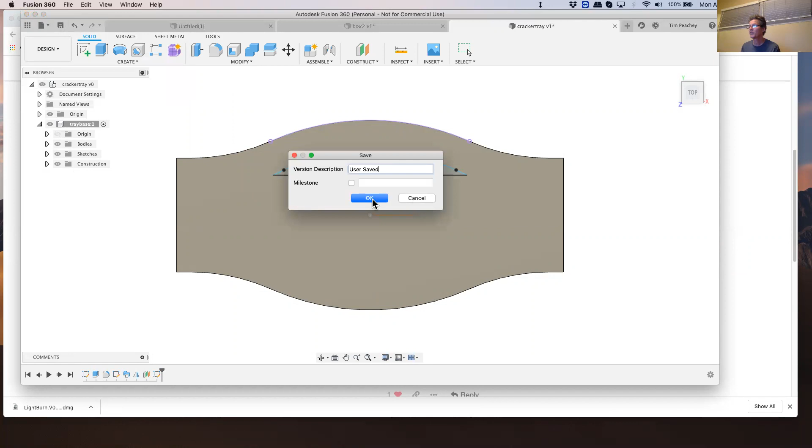And I want to have a dimension on here, because I can change this dimension to 75. Now I can control how long the path is that I'm going to cut out. Okay, and I'm going to finish that sketch. Now, one thing I should be doing as I go along here is save, because some of these functions occasionally crash the computer, although there is an auto save that works pretty well.

Now the next thing I'm going to do is create another sketch. Tim, all this last construction, that is on the plane that was 5 millimeters above the surface, correct? That's correct. Okay, so if I go like this, you can see it's there.

And you know, I'm building some geometry as I go. So I'm going to go back to this sketch. Oops, what's going on here? Sketch, edit sketch - there's something else I'm going to need. I'm going to need a point right here, so I'm going to create a sketch point. I want it right here at this point, and the little triangle tells me that it's at the midpoint of the arc, and that's what I wanted. Okay, so I'm going to finish that sketch.

I'm going to create a new sketch. Oops, create a new sketch. And I'm going to make this new sketch on this plane of symmetry. And I'm going to create a circle.

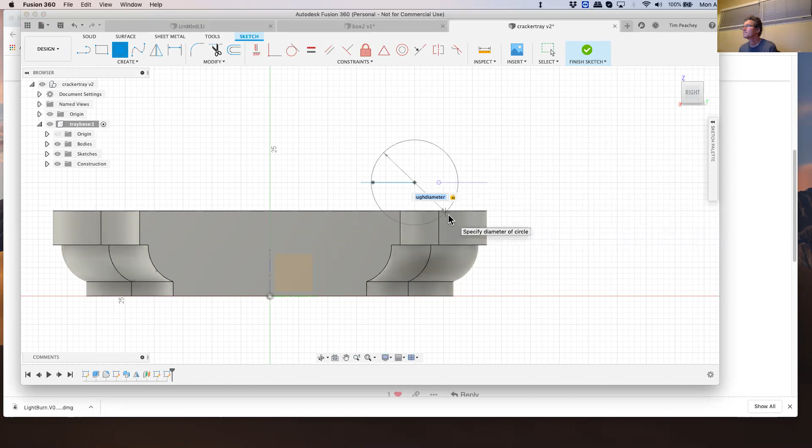And I'm going to tell this to be the... what did I call it? Trough? No, trough diameter. And that's basically it. I'm going to finish my sketch.

I'm going to come back here and create a sweep again. I'm going to select this as my profile, single path. I don't need chain selection. This is my path. And a cut. And now I have my groove.

Now, maybe that groove's too shallow, so I'm going to come back to this plane here and edit the plane. Instead of 5, let's make that 3. Boom, now I have a deeper groove.

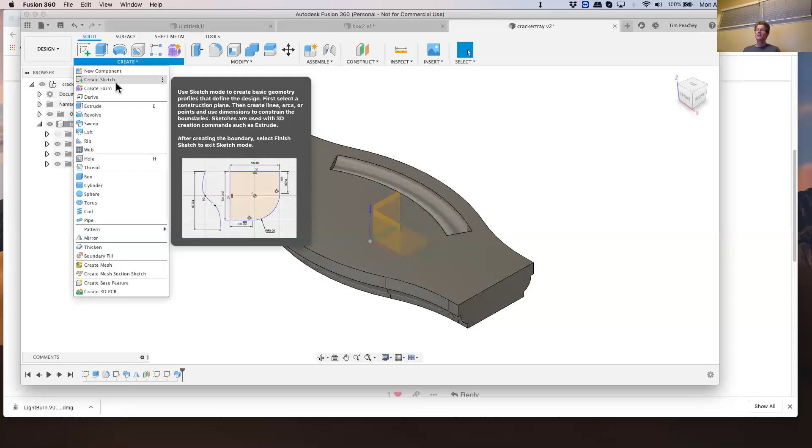Problem is, this part isn't great. There's a number of different things I could do here, and we're running a little bit late on time, so I'm just going to tell you what they are. One is I can figure out where to create a sphere using the create sphere tool, and it would basically be the end of the arc.

So I could create a body sphere on... let's turn on this sketch here. Oops, that's the wrong sketch. This sketch here — would the end of that line be the center of the sphere?

Tim, could you have buried that sphere and run it across the sweep just like you did that circle? I'm not exactly sure, I haven't done that. It's possible — I'm gonna try and figure that out, because that would be a lot cleaner. It just popped in my head when I saw you do this sweep, and then pick up that sphere. Yeah, it's not letting me see the sketch when I do that, is it?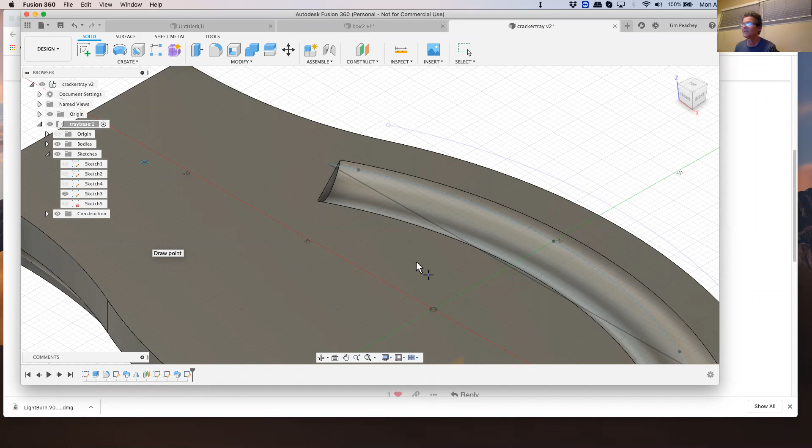Yeah, I need to put a sketch point on there to do that. The other thing I could do, quite simply, is — I do need to go back to this sketch here, whichever sketch has it. Oh, this sketch here is it, so let me edit this sketch here. I'm stuck in the middle of some nonsense here. Okay, so I'm going to edit this sketch here because I think I need another sketch point.

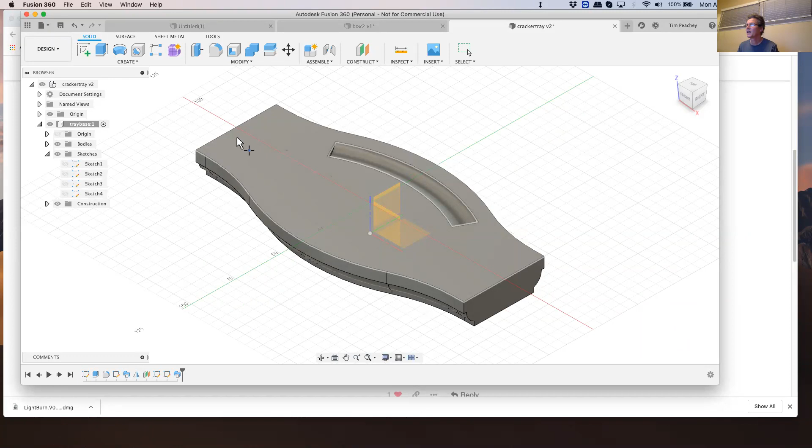Tim, just to describe it to us — would you be placing the sphere of the same diameter that we had previously cut, with the center of the sphere at the end of that line, and then you would do a cut? Correct. And then would do a combine? Combine — but as a Boolean operation, a subtraction. Oh, got it. Okay, wow. Use the sphere as a tool.

And the other thing that can be done here too is we can create a sketch on this surface right here, which now we can't see the body very well, so I'm going to spin it around, and I'm going to create a line.

Where am I going to create the line? I need the line on this plane. I need to create... before I do this, let me try something else here.

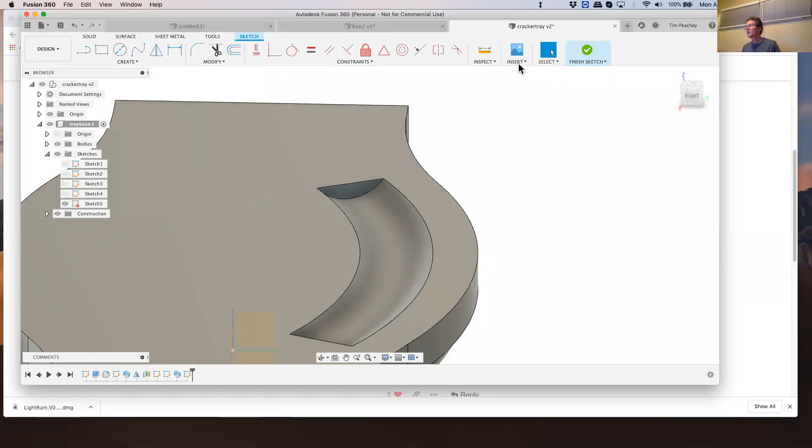Let me construct a line axis through two planes. And the two planes are going to be this plane and this plane. And it's not allowing me to do that.

Because — what, I did this the other night and now I'm missing a step. But basically, I had a line through the center and then I did a revolved cut. Where that line across the top was your center axis of rotation? Correct. Wow, okay, that's really cool.

That's how far I got, and I couldn't get to getting the ends rounded off. Yeah, again, some of these plane creation tools don't look like they're quite as robust as I would have hoped. But actually, let me try something else.

So this sketch here is going nowhere. So let's... on this plane, that's what it was, now I know. On this plane, I'm going to create a sketch. Come on this plane. Sketch, plane. That's weird — oh, because the plane's not visible. Okay, so now let's try this again.

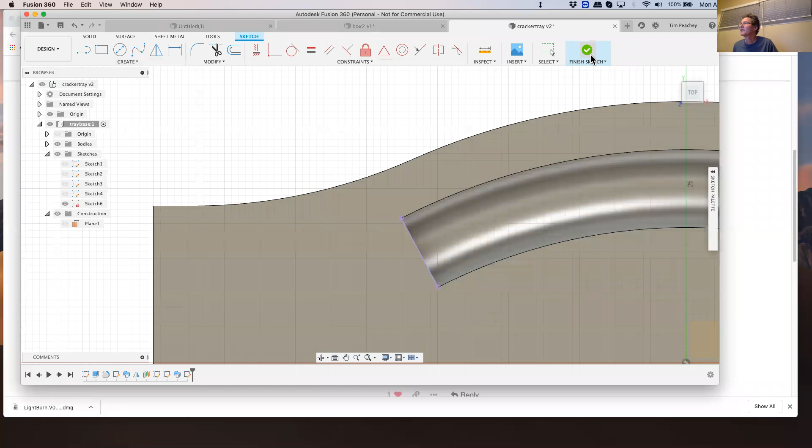We're going to sketch on this plane, and we're going to project this line. Okay, and we're going to finish that sketch. We're going to create another sketch where we sketch on this plane.

And now we create a circle on the midpoint here, and I'm going to go like this. I'm going to use a midpoint constraint, so this guy gets locked to the midpoint of this. And then this diameter becomes the trough diameter. And then we draw a line across here to here, making sure that these lines are coincident.

And then we trim the top part of the circle, and let's finish the sketch. Then let's revolve this profile about this axis 360 degrees.

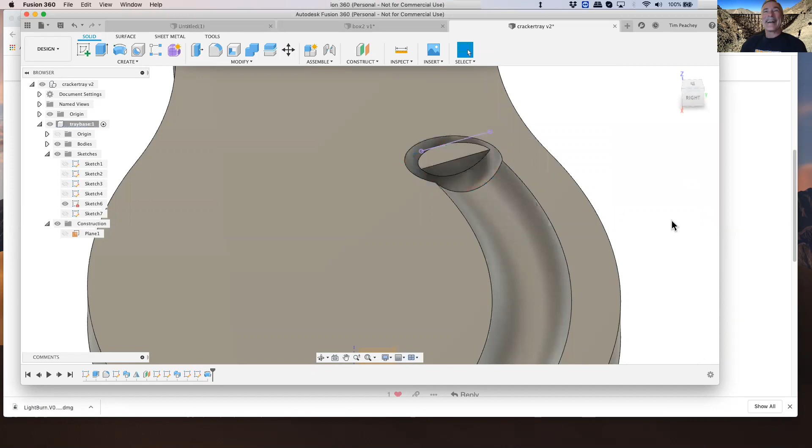And we did something wrong. It looked like the trough diameter was pretty large when you did that. Let's edit the feature and see what we did. One side cut, type angle. That's all okay, even though we really only need to go 90 degrees.

Is it too deep, Tim? Is the plane down too far? We were on the wrong plane, I think. Yeah, let's see. Do a section. But where was this? Okay, let's turn this plane back on.

So that plane should be controlling everything, it should all be on the plane. And this sphere... what did it do to me now?

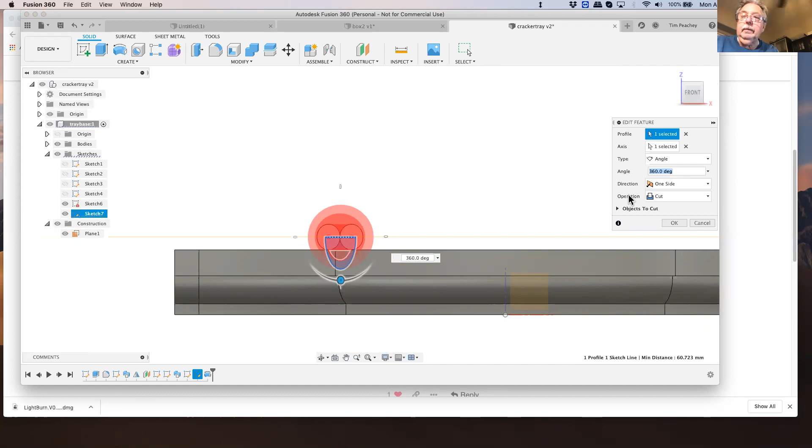Made a smiley face. There's something wrong with my sketch. Is the plane at the same height as we originally used to create the trough? It is, but you know what the difference is? No, that's diameter. Did I do the radius? No. So it just looks like the diameter is too wide.

Yeah, so let's go back to this sketch here. Oh, we are in this sketch. And let's delete this, and let's project—that's what we did. Project. Well, actually, in fact...

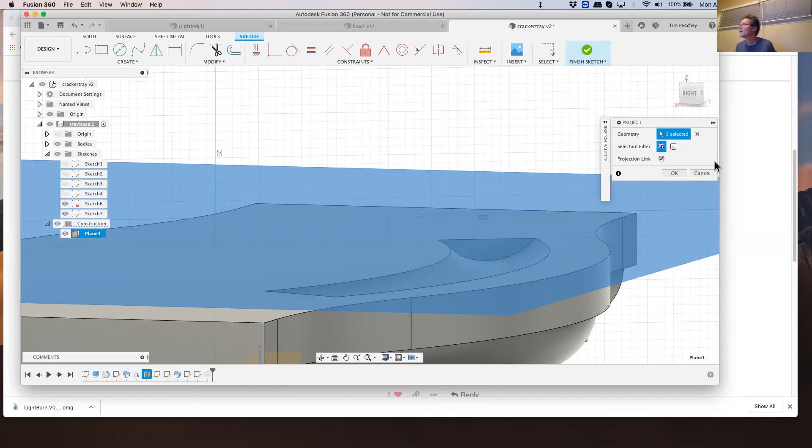Wow. So we just have that line. That's really all we need at this point, I believe. So let's go finish sketch. Let's delete this feature. And what's this sketch here? What's going on with this sketch?

So let's try this again. Let's revolve this profile around this axis. That did it, that was it. Something got selected wrong there.

Previously you'd extended that line segment projection to be another line segment, the diameter of the trough. To be the full circle, yeah. And somehow I had an error in there. Got it.

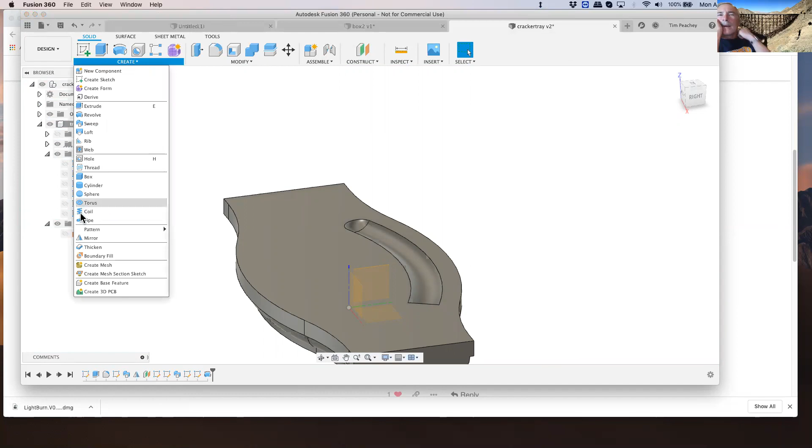I'm going to mirror this about... again, sometimes they...

Tim, you're going to do this next part via a mirroring function? Yeah, mirror is just an easy way to do the same thing twice. Travis is doubting you. Well, Travis has looked at a lot of mirrors and they don't work that way, but okay. Based on the last 5 minutes, I'm doubting myself.

Whoa, that was fast. Well, it was a little clunky getting there. That's beautiful. And the other thing, of course, that I want to do is change the appearance.

And let's go do some wood. What kind of wood do we want here? That kind of looked like oak, didn't it? So when we do it here, this isn't rendering, but it does give us some idea of the wood.

Appearances and materials are something we want to look at in another lesson as well. When we specify physical materials, we're also including things like density, modulus, strengths, things like that, thermal behavior for the analysis simulation workspaces. But we can specify appearances and materials separately.

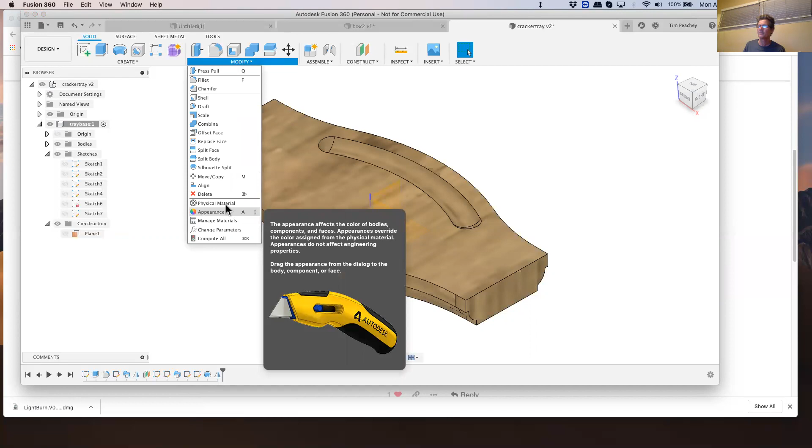Hey Tim, that was great. I tossed that challenge out there because this is something we were trying to do in CNC for the holiday gift sale. And Rob went off and figured out how to do it inside of VCarve, and he's been cranking these things out. Rob, do you happen to have an image there that you could show people of what you did?

I think it'd just be fun for you folks to see, because he's been working this from a different tool. Our design challenge is something you'd still like to continue, because boy, that was quite amazing to watch happen. And I can imagine other people have ideas too about how you'd pull that off. Yeah, yeah. And sometimes something looks simple and then you realize it's not that simple to do. And sometimes you overthink it and make it way harder than it really is. But the thing I like about doing it as a design challenge is that I'll come up with one or two ways myself, but I'm fully expecting two or three new suggestions to come out in the discussion, and that's how we all learn.

Yeah, so I'm on my iPad. Let's see if I can figure out how to share the screen here. Share content. Am I ready? It says you cannot share the screen while others are sharing. But Tim has to let it go first. Okay, share screen.

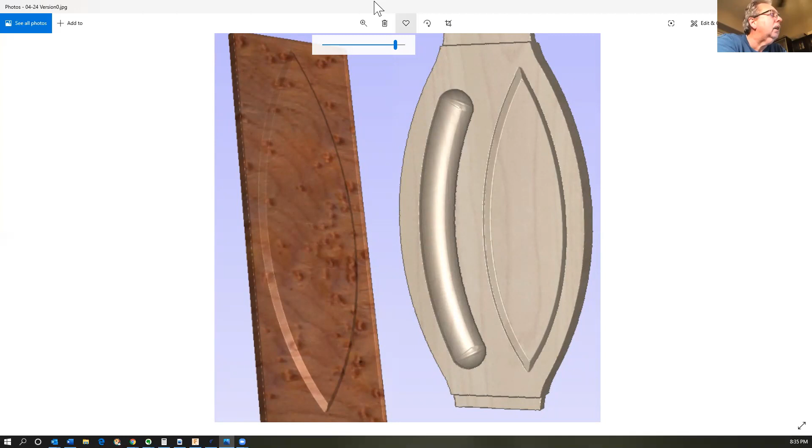So that's how it works. Thank you, Rob. I'm getting ready to carve it in some hardwood here to see if it really works as good as MDF. And I put the mortises on, I put the tenons on the end so that one of the turners can actually turn something to go on there. I think I can cut the mortise on my machine, and then Gary's willing to do them at the shop, and then they can turn them.

You saw the other picture, which is what he's working from, the challenge, right? Yeah. That's great, Rob. Thank you.

One other thing that often happens when we think about these different ways, we've talked about the different ways to define things. And sometimes we get stuck in a mindset of how to create a feature, and maybe it's based on how we would actually build it, or maybe it's based on something like that. But sometimes we overcomplicate it.

So while I was looking at what Rob did, I just realized that this is way easier than what I made. I made this way tougher than I should have. So for example, let's create a sketch on this plane. And I'm just going to tip it down so I can see it.

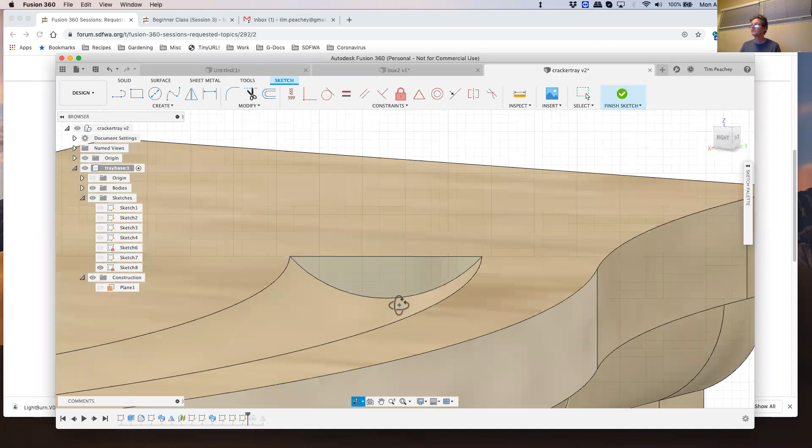I'm going to project here and here. Oops, I didn't get my projection, did I? Project that, and here. And okay, then I'm going to draw a line from the midpoint here down, and I'm going to trim this. Trim. These geometries don't want to trim, why not? Am I not? Oh, okay, I have what I need there.

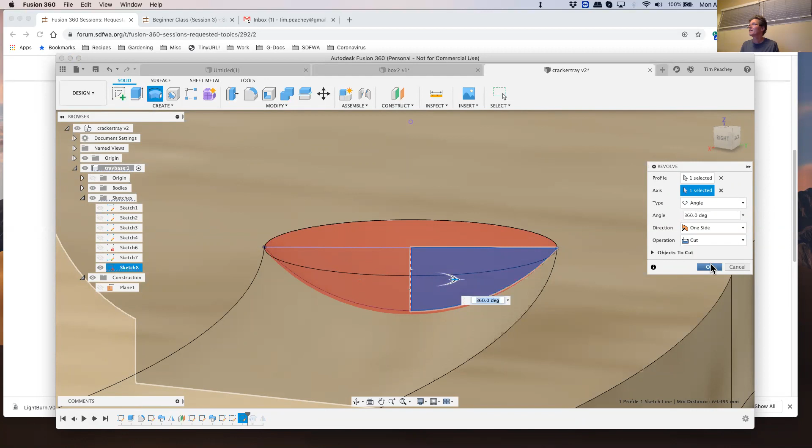Okay, so I'm going to finish the sketch. Then I'm going to create my revolved cut. I'm going to grab this profile, and I'm going to use this as the axis. Right? You just think about it from a different angle. That was way easier. Oh my gosh.

Well done. So sometimes it pays to go out and grab some crackers and measure them, because it gives your brain a chance to come up with a different way to do things.

Or go find a glass of scotch. I find that helps too. Mark is with you on that. Or that idea comes to you about 3 o'clock in the morning on how to do something. It's not at all unusual, that's for sure. You're going out for a walk, right now about all we can do for recreation around my neighborhood is go for walks and cross the street every time you see somebody with a dog coming the other way. But it's a good time to sort things out in your head.